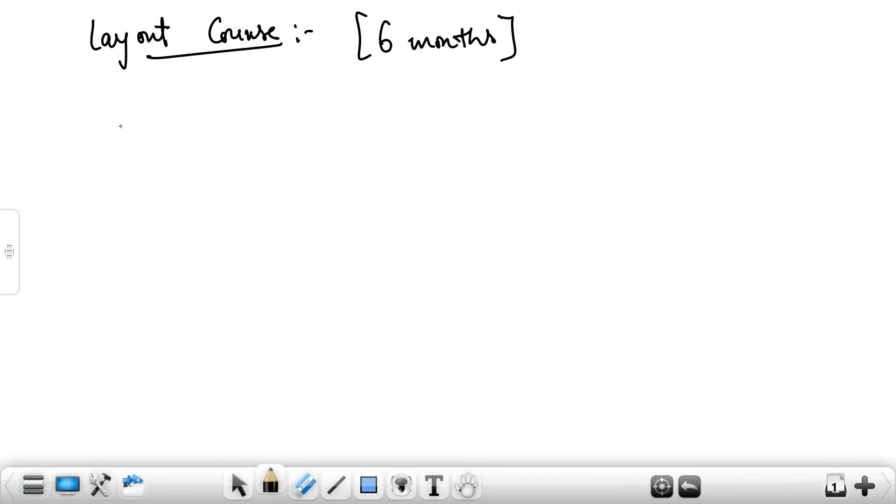So we'll be talking about these digital design circuits, and then we will be teaching you one editor, that is GVIM editor. We'll talk about this GVIM editor. After this, we'll be talking about a few scripting languages we'll be teaching you for the backend layout engineer.

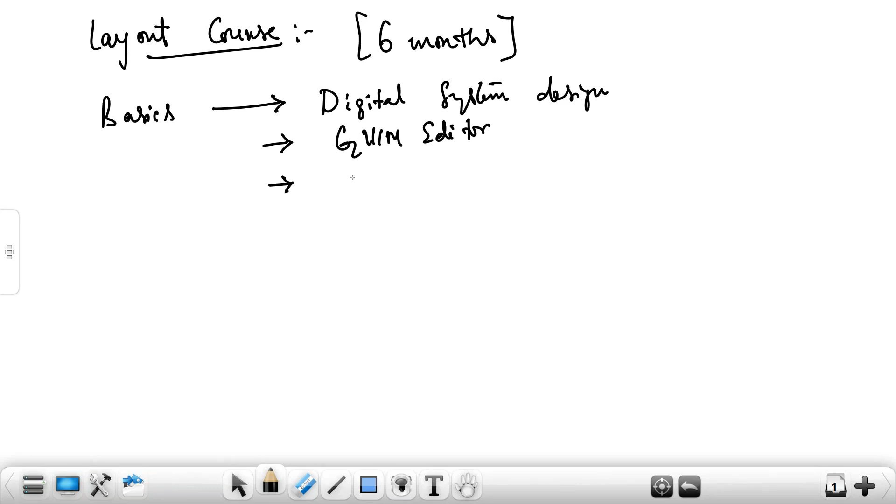So those are, we'll start with some Linux commands, basic Linux commands, and then we'll be going through tool command language, scripting language. This is about the basic course. This will go around 3 weeks or 4 weeks, probably sometimes it will go 4 weeks.

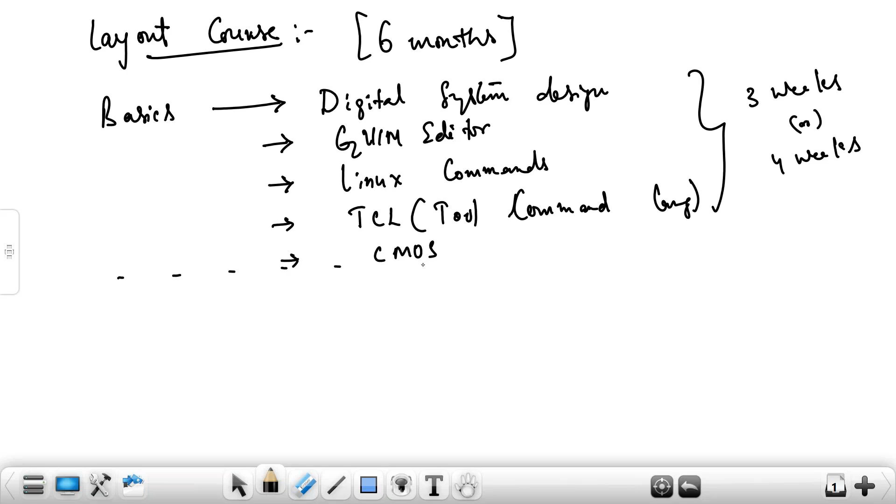So after this, in the basic course, we'll even be covering CMOS also. Once you cover this basic course, we'll be moving into the advanced layout part, where we'll be giving a brief idea about network theory, then we'll go to the layout part. Advanced layout part will go 4 months. So this is the syllabus we will be covering in the layout.

So if you look at what are the tools we are using for the layout part, the tools we are using is custom compiler from Synopsys. These tools are basically used to draw. I'm talking about the tool related to the advanced part of the layout, and probably they will be using other tools like Cygwin.

They're used for scripting languages like tool command language, and then they'll use Cygwin for Linux also. I'm not talking about that, I'm talking about what tools we are using for the advanced part of the layout. So in the advanced part of the layout, we'll be using the custom compiler.

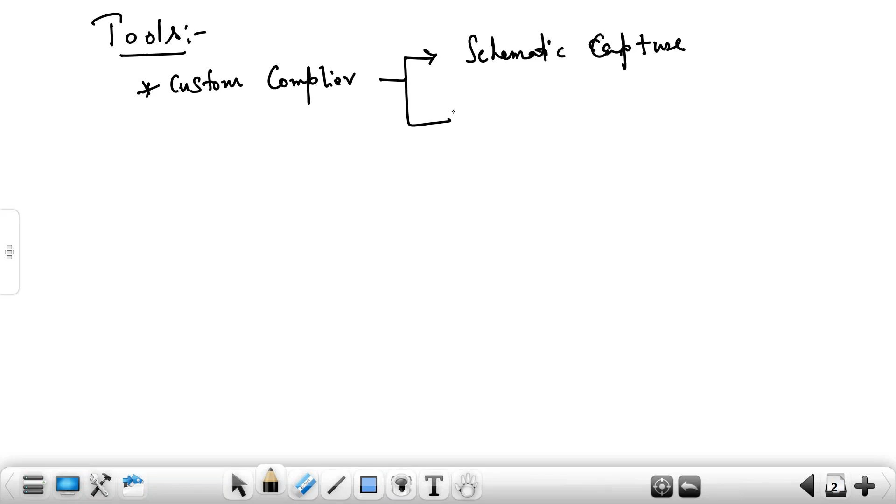Basically this is used to draw the schematic, to capture the schematic. We'll be using this for schematic capturing and pre-layout simulation, and to draw the layout we'll be using the custom compiler.

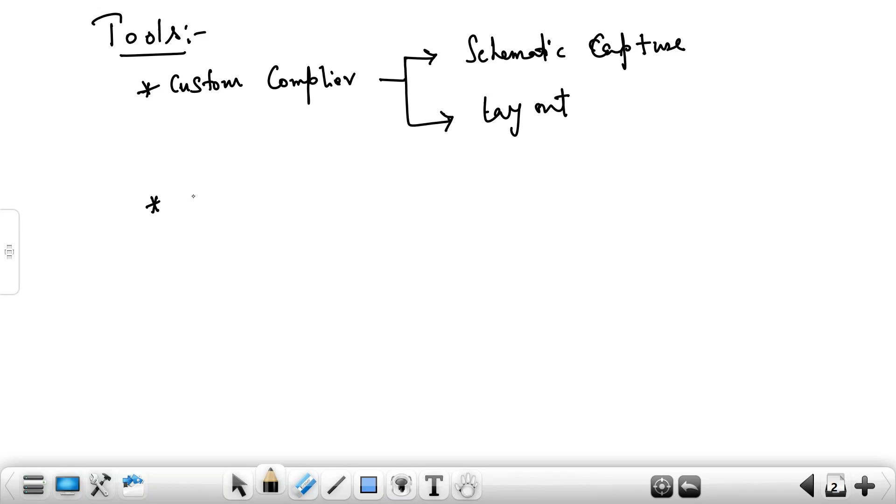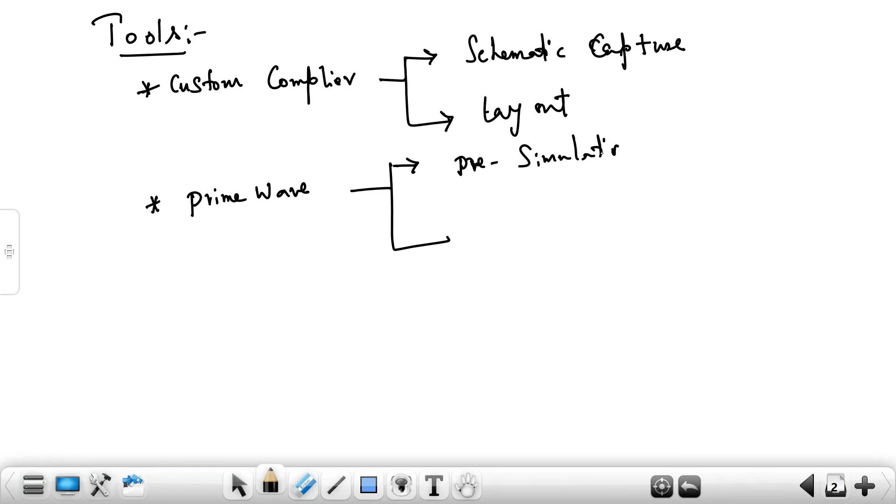And other tools which we are using for pre-simulation and post-simulation is PrimeWave. Basically these tools are used to do the pre-simulation and then post-simulation. And other tools which we are using is nothing but IC Validator, basically used to do the physical verifications.

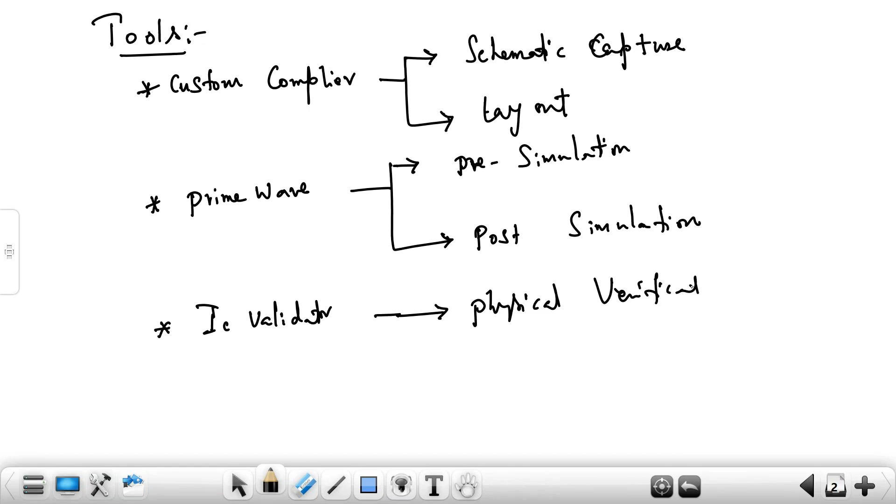Physical verification is used to check the DRC rules, the design rule checks. LVS check means layout versus schematic check. And then the tool we use to do parasitic extraction is nothing but Star RC. Star RC tool is used for parasitic extraction. So these are the tools.

So we are working in the advanced part of the layout. Now let us understand the role of the layout engineer. Why does a layout engineer come into VLSI? What is the role of the layout engineer? Basically, the layout engineer is used to design analog integrated circuits.

Layout is nothing but drawing. This is graphical. We are writing the graphical shape of the schematics. Graphical shapes of the schematics. So we need a layout engineer.

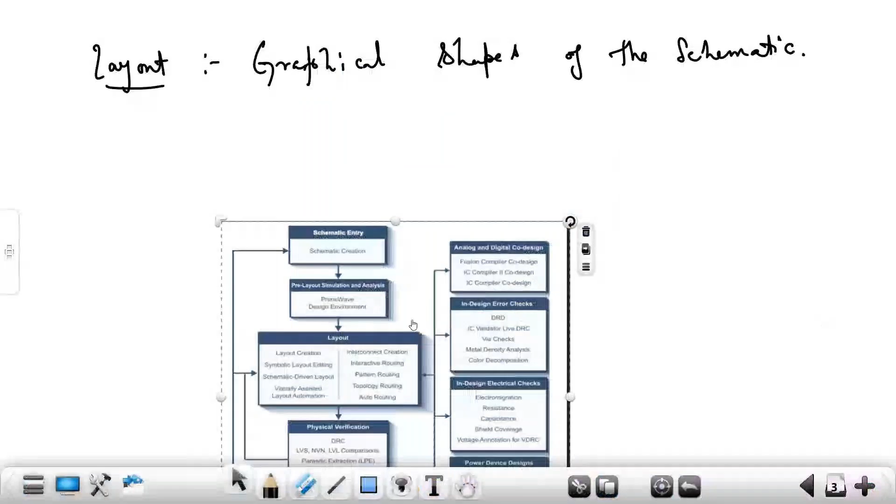Let me talk about this diagram. If you look at this diagram, this is the entire flow of layout. We'll start from capturing the schematic, up to post layout simulation. So any idea or design starts from here. We'll start from the schematic entry.

First, based upon the idea, suppose I want to design an analog circuit for amplification, an amplifier. We know that analog circuits deal with signals available in the real-time world, which are analog in nature. Nowadays, many analog domain signals are trying to push towards digital, where digital circuits are less prone to error and more efficient than analog.

Still, why do we talk about analog? Because if you take any signal before converting it, any signal available in real time is analog in nature. So without analog, it is not possible to interact with any circuits. Whatever signals you see, like voice signal, temperature variation, wind variation, all these physical quantities in real time are analog in nature.

So when you are capturing the analog signal and feeding it into the analog to digital converter, the strength of the signal is not high. So we need to amplify that. We need to improve the strength of the signals. That's where analog circuits are required.

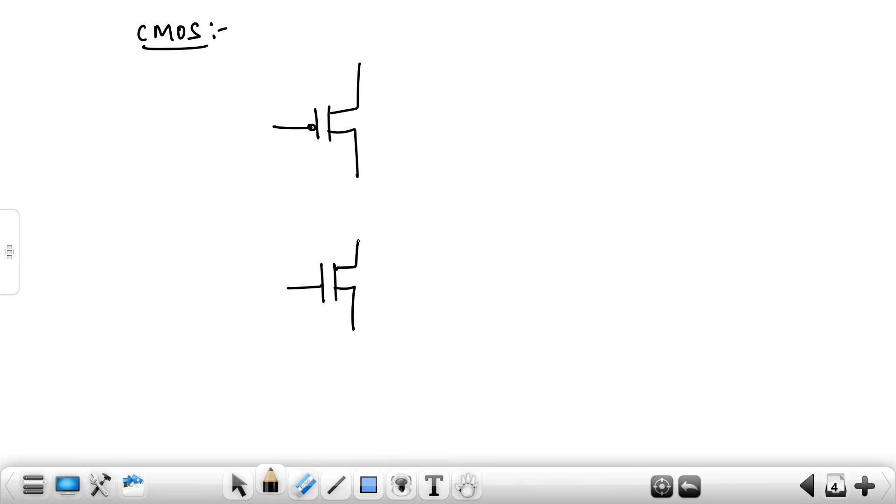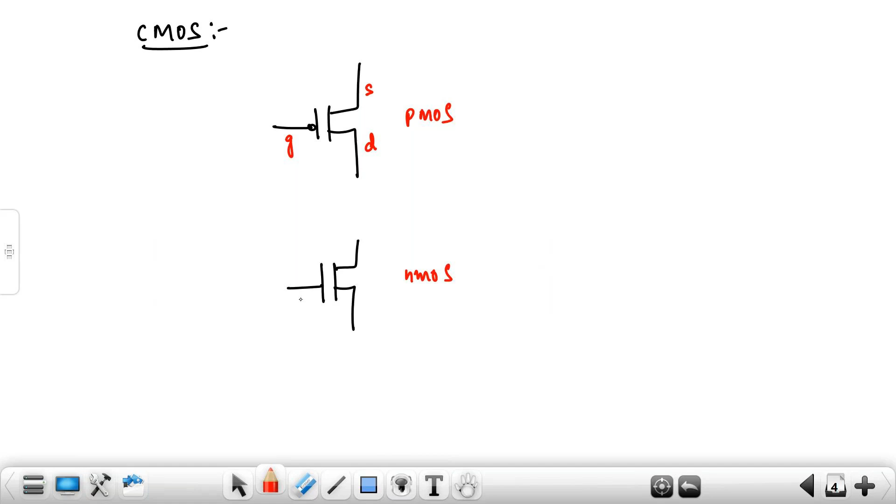Suppose you take an example of CMOS, complementary metal oxide semiconductor. It's a combination of PMOS and NMOS. If I draw the schematic of CMOS, this is my symbol of PMOS, and this is a symbol of NMOS. This is a three-terminal transistor: this is the gate, this is the source, this is the drain. Again, in the NMOS, this is the PMOS circuit and this is the NMOS circuit. This is gate, this is drain, and this is source. And if I draw the VDD and VSS rails, this is my VDD rail, and this is the VSS rail.

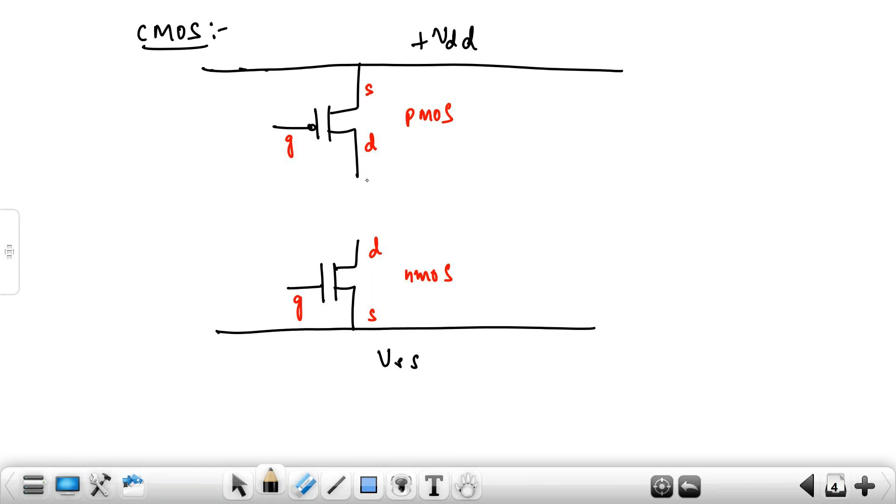Gate and gate will be shorted, and we will have a demarcation line. Above the demarcation line, we call it the pull-up network. Below the demarcation line is the pull-down network, where gate and gate are shorted, connecting to the input, and drain and drain are shorted, connecting to the output, Vout. So this is the schematic of what?

CMOS inverter - I call this complementary metal oxide semiconductor, a combination of PMOS and NMOS. To design any analog related ICs, first we start with an idea, and based upon that idea, we draw the schematic. Once you draw this schematic, we should understand how this schematic is working.

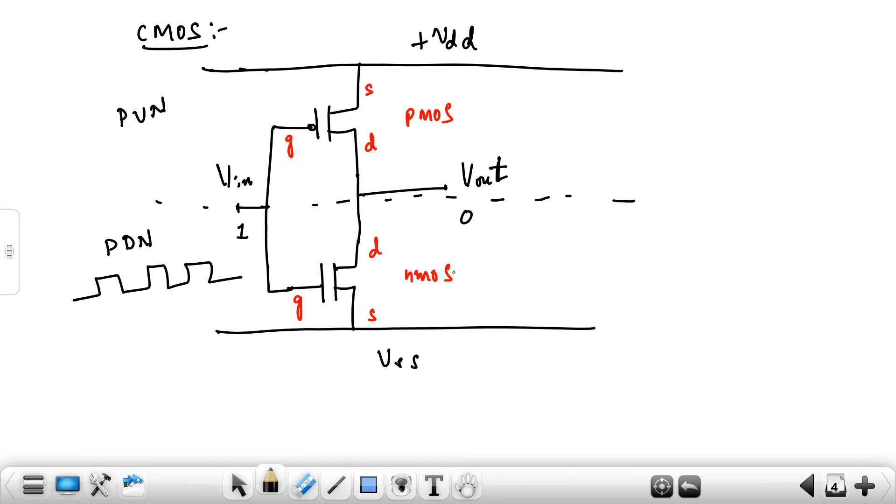So this is the CMOS inverter. The inverter operation is nothing but if I give the input as logic 1, it gives me the output as logic 0. So if I'm giving any pulse like this, the output should be the complement of this, complement of this. So this is a step we call as pre-simulation.

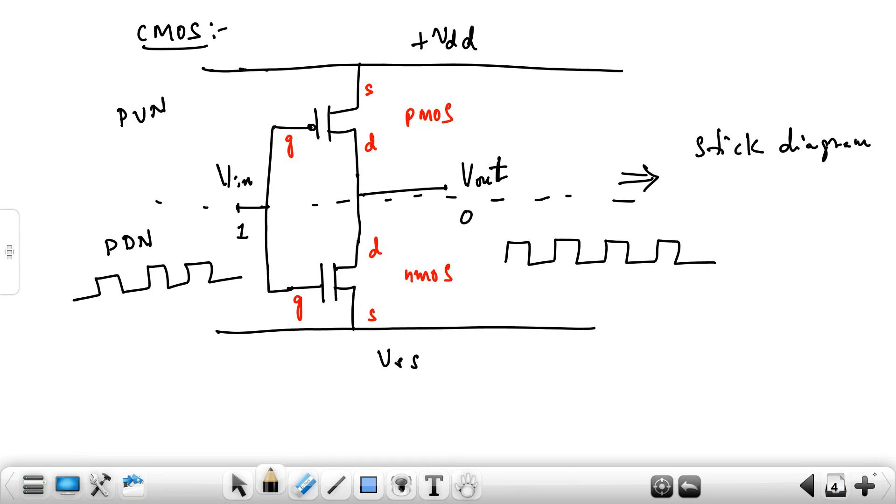First you capture the schematic. Once you capture the schematic, do the pre-simulation. Once you do this pre-simulation, then we'll be drawing the stick diagram. Stick diagram - if I draw the stick diagram for the CMOS inverter, how you can draw?

This is my VDD, this is my VSS, this is my VSS, and this is my demarcation line. So the transistors are represented like a symbol plus symbol. This is a PMOS above the demarcation line. Below the demarcation line, this is nothing but an NMOS. Above is PMOS, below is NMOS.

Now I can label the transistor terminals. Like this, I'm going to label as gate. This I'm going to label as drain, source, and this is nothing but drain. Similarly for this NMOS, I'm going to label this as gate, source, and drain. This plus symbol indicates the PMOS and NMOS. So how can you connect this in the stick diagram?

How to draw the stick diagram? This is nothing but - you can see the source of my PMOS is connecting to the VDD line. So this is connecting to the metal. This source is connecting to VDD, and this gate and gate is connected. The gate is made up of polysilicon. This is connected - gate and gate of both PMOS and NMOS, and then this gate is connecting to the input, to the metal.

This is V-in, and then drain and drain are connected. This is connecting to V-out. So this is the stick diagram of the inverter. So we need one PMOS and one NMOS. Source is connecting to VDD, and this source is connecting to VSS, this source is connecting to VSS.

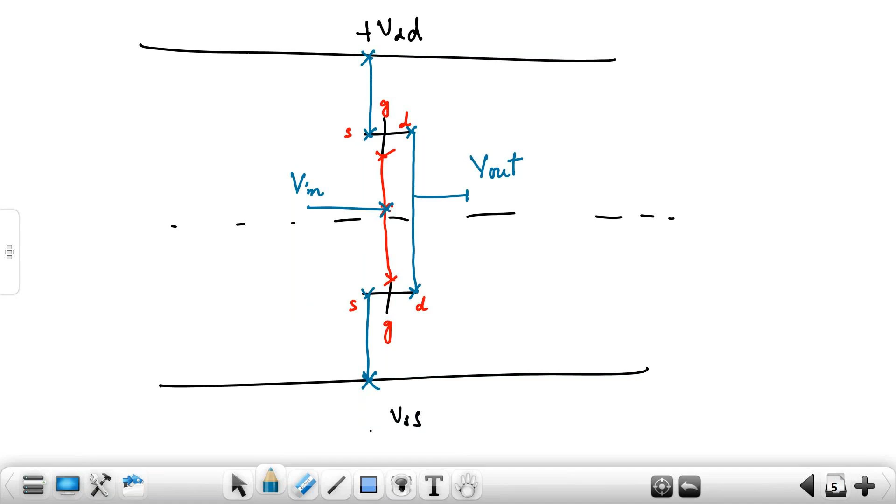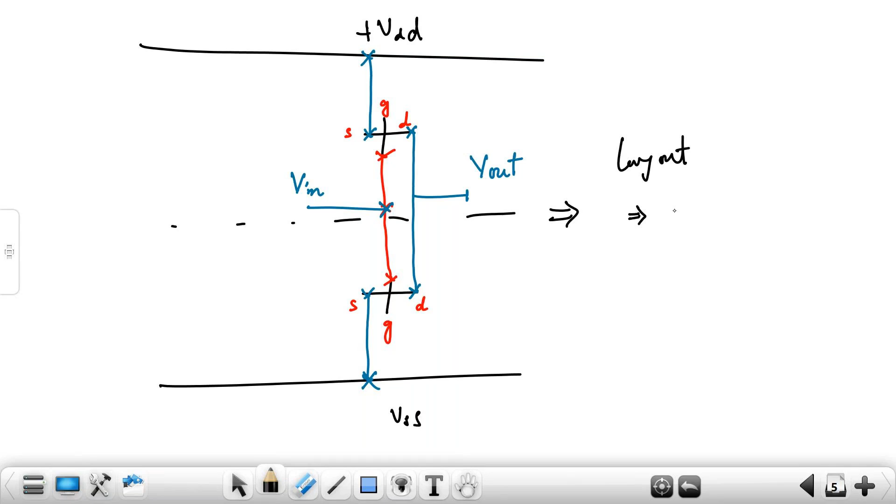This is what I'm transforming - my stick diagram into the what? Schematic to the stick diagram. Transforming the schematic diagram to the stick diagram. Now, what is a layout? It's nothing but when you know how to draw the stick diagram for any schematic - layout is nothing but the standard dimension. This is nothing but a stick diagram with standard dimension, meaning dimension. This is nothing but a layout.

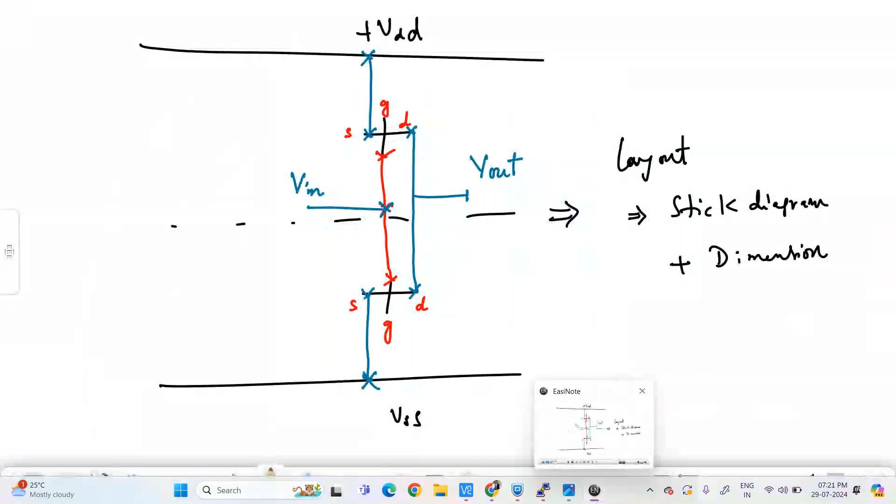So in this course, we will be talking about how to capture the schematic. Once you capture the schematic, how you can do the pre-simulation. The steps are like the flow of this layout, designing any analog based integrated circuit. The flow goes like this: start with the schematic, do the schematic creation. Once you create the schematic, do the pre-simulation. The pre-simulation is basically done with the PrimeWave - the tool which we use for this is PrimeWave.

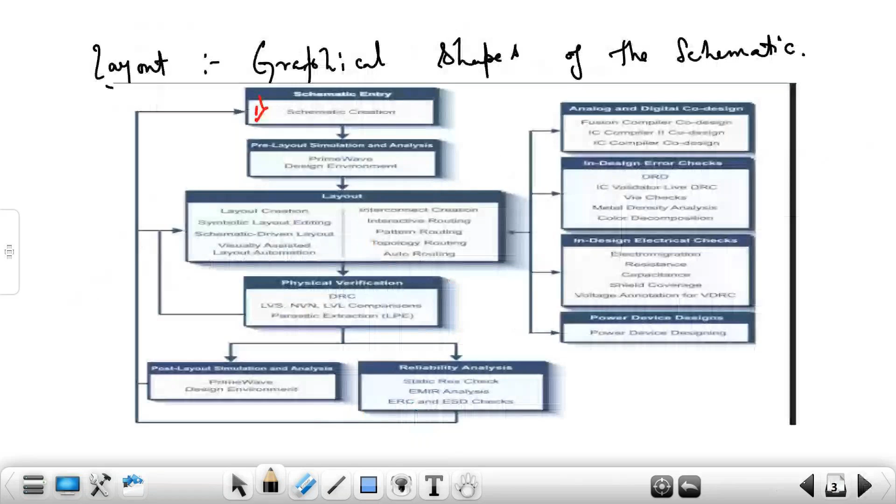This is what, let me show you. So start with the schematic creation. Once you create the schematic, do the pre-layout simulation using PrimeWave design environment. Once you do this pre-layout simulation, again we'll go for the layout. In the layout, we'll do how to do the routing, how to do schematic layout editing, how to do auto routing, topology routing, pattern routing, interactive routing, how to do interconnection of the layers. This is done at the layout section.

So once you draw the layout, we will be working with DRC rules. DRC means it is a design rule check. This design rule check will be depending upon the foundry. So different nanometer technology works with different DRC rules, provided by the foundry. So based upon that, different node which you are working on, different channel length which you are working on, you have to verify your layout with DRC checks.

DRC checks, and you will do LVS checks - design rule check, LVS check, and other checks we will do. Then after doing the checks, we'll do the parasitic extraction checks, LPE checks. So at the time of layout, the other checks we are doing are design error checks like DRC error, via checks, metal density analysis, color decomposition, and then some electrical checks like electromigration, resistance check, capacitance check, shielding coverage checks, and then some power device design checks we'll do after drawing the layout.

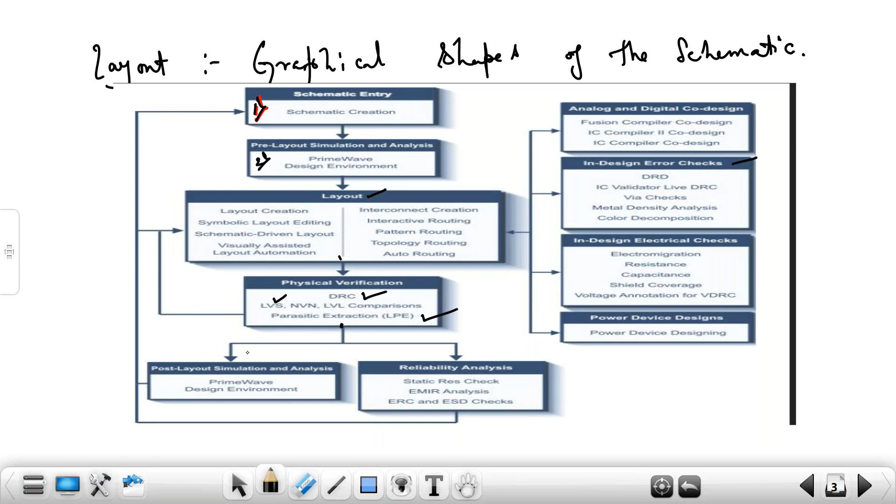So once you draw the layout, we will be doing the DRC and LVS checks. Then after that, we'll do the parasitic extraction, and again we'll do the post-layout simulation, comparing the operation after drawing the layout with the pre-layout simulation. We'll also do checks like reliability checks, static resistance check, EMIR analysis check, and electrical rule checks after drawing the layout.

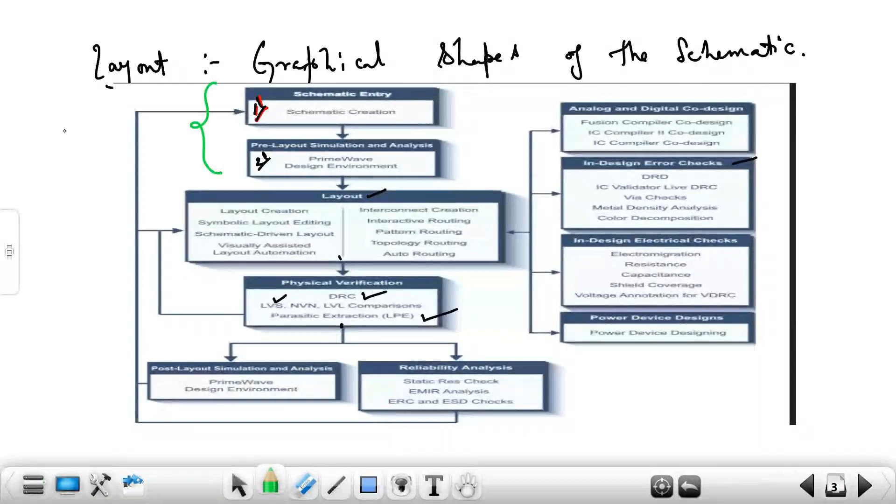So if you see this entire flow of layout, this part is handled by the design engineer, and this part is done by the layout engineer. Basically this section can also be called post-layout engineer, and sometimes this is also done by design engineers. So in our course, mainly we'll focus on this: the custom layout design.

So we'll focus on this. Given a schematic, after doing the pre-simulation, we'll understand how to draw the layout for the schematics, and mainly focus on how to do DRC checks and LVS checks. Then we'll see how we can extract the parasitic extraction, like resistance and capacitance checks.

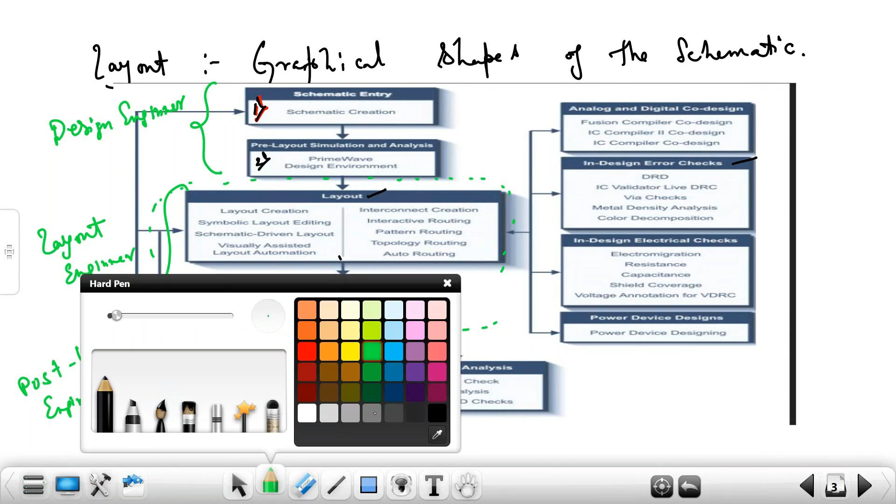So for this flow, I've already mentioned what tools we are using. For capturing the schematic, we'll be using Custom Compiler, and for the pre-layout simulation, we'll be using PrimeWave. To draw the layout, again we'll use Custom Compiler, and to check LVS and DRC we'll use the tool called IC Validator. To do parasitic extraction, we'll be using StarRC, and again for post-layout simulation, we'll be using the PrimeWave environment.

Many other SPICE tools are available, but we are using PrimeWave from Synopsys. For the other checks, we need other tools which we are not discussing, since those tools cost more. So we will not be doing all those checks; mainly we'll focus on how to draw the layout and how to check DRC and LVS.

So this is the entire flow to design any analog integrated circuit. The flow starts like this: start with schematic creation, do the pre-layout simulation, then draw the layout, then do verification like DRC and LVS and other checks, then do the post-layout simulation.

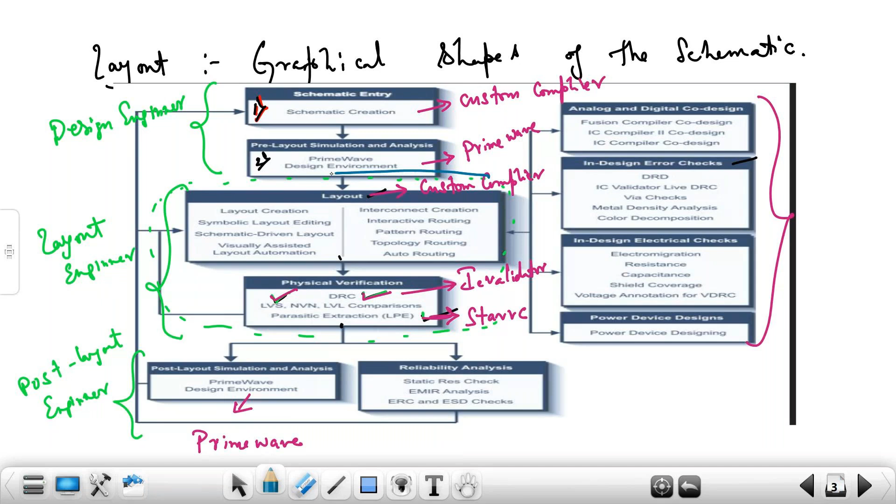In this course, especially, we'll be more focused on this part. We will teach you some analog circuits like level shifters, Schmitt trigger, single-stage op-amps, two-stage op-amps, and some PLL circuits, PLL blocks, and voltage controlled oscillators. We'll show you how to capture the schematic and do the pre-simulation, and once done, we are going to draw the layout for the given analog schematic.

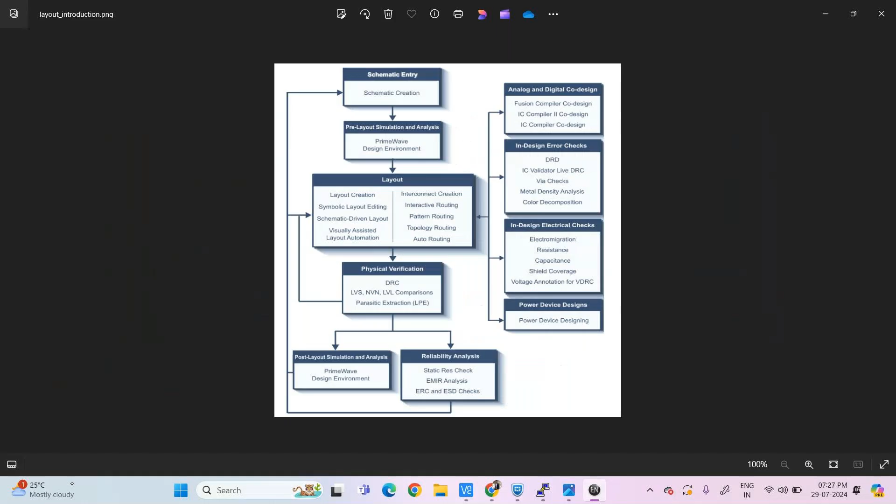So with this brief introduction, as I mentioned, this is a 6-month training course. The first 2 months basically cover the basics like digital system design, CMOS, and semiconductor metal oxide fundamentals. Then we'll talk about TCL programming, then the Linux part.

In the advanced part, we'll go through network theory, and then we'll start with what are the different layout issues, and then talk about how to do prevention of layout issues. So in this course, let's go through the syllabus and what circuits we'll be covering.

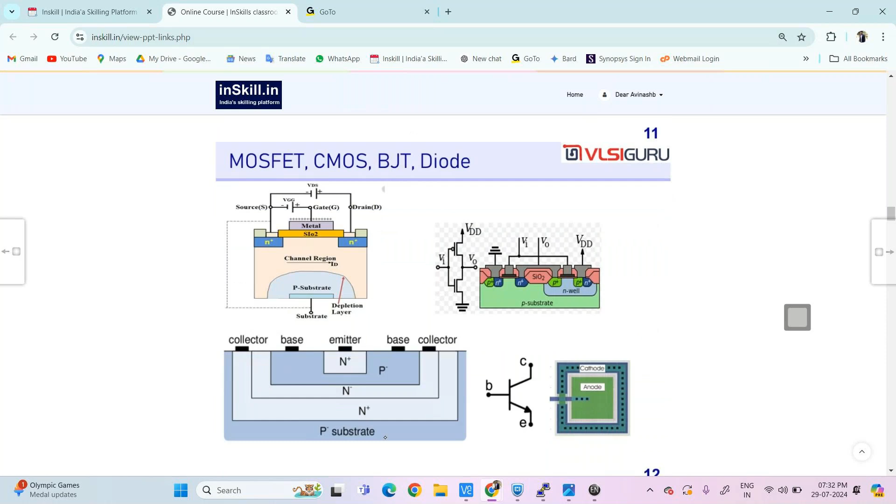In CMOS, we'll be talking about complementary CMOS, semiconductor properties, and MOSFET, different types of MOSFET and its operation. In device physics, we'll talk about basic semiconductor devices like diodes, PN junction diodes, bipolar transistors, and MOSFET. Then we'll talk about the fabrication process, and we'll understand how to draw the stick diagram for a given schematic.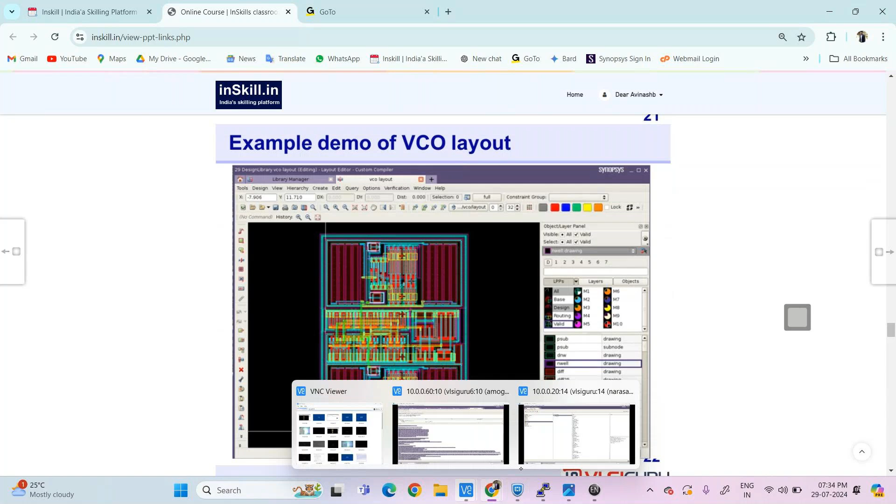Let me show you a few layouts which we developed. The tool we are using for this is nothing but Custom Compiler to draw the layout.

So you can see, let me go with the circuits. Let us go with the inverter. Okay, let me go with some analog circuits. An analog circuit, I'm taking as a level shifter. This was the schematic of the level shifter.

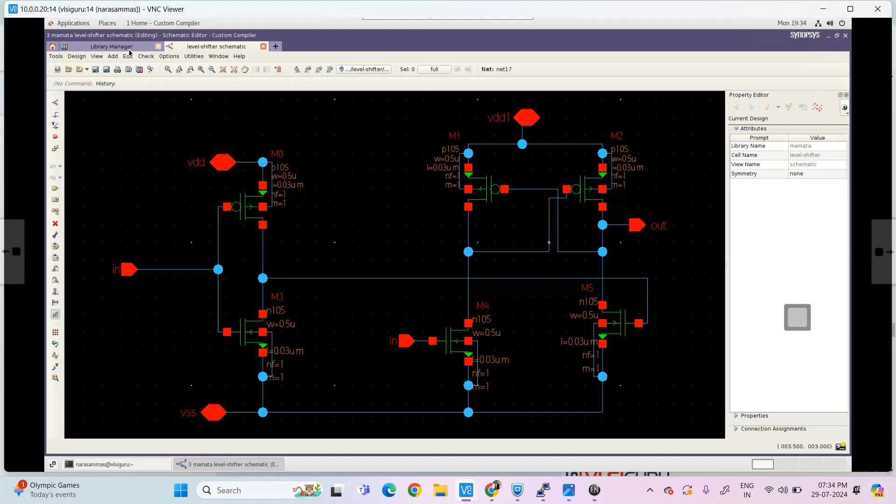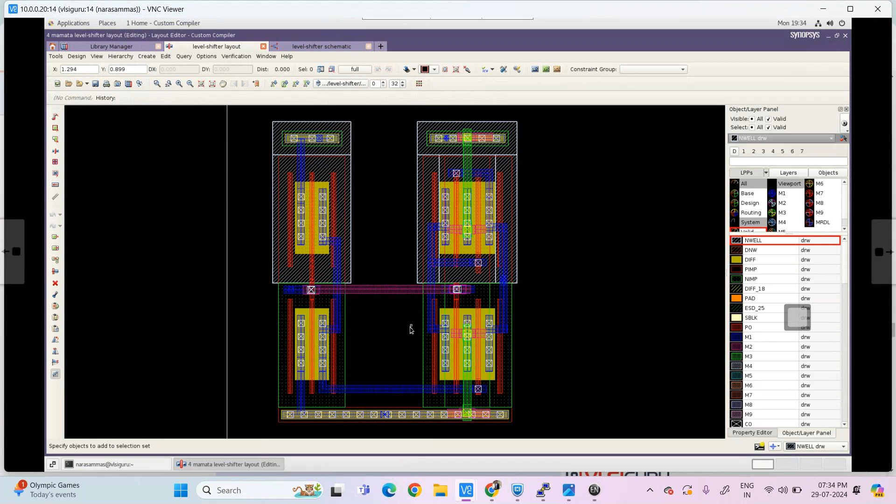We'll be teaching you how you can draw the layout for this. You see, this is a layout, this is a layout of the level shifter, made up of three CMOS - this is one CMOS, and this is two PMOS and two NMOS. We will make you understand how to do routing, how to do placements, how to draw the different metals, and what are the properties of the different metals. We will be teaching you this, and even the pre-simulation. So let me go through this.

For pre-simulation, we'll also teach circuits like PLL, converters, single stage op amps, dual stage op amps, some circuits like source followers, and current mirror circuits.

I think this is not working. Maybe the server is busy.

Some of the circuits will teach you how to do the pre-simulation. For example, you can see this is one of the circuits for the phase frequency detector.

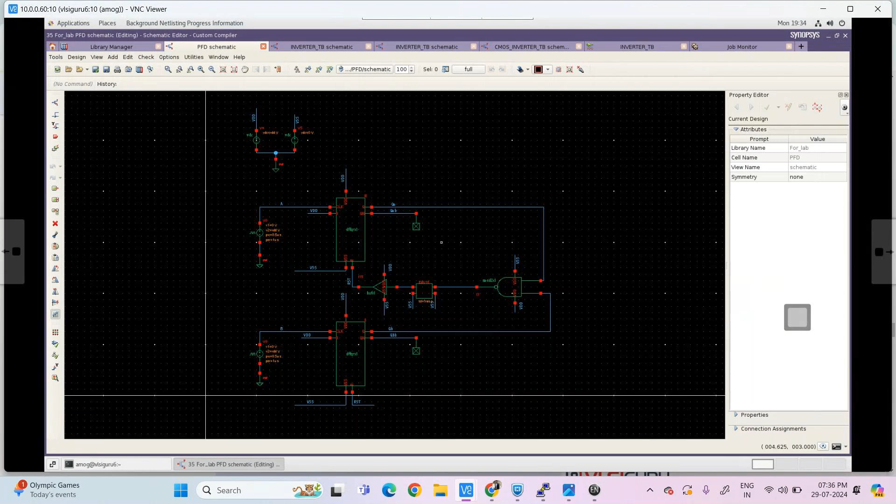So this is one block of your PLL. We will be teaching you all the schematics used for bigger blocks like PLL and analog to digital converters, including how to draw the schematic and do pre-layout simulation and then the layouts.

So this is the complete overview of what circuits we'll be talking about in the analog layout part.

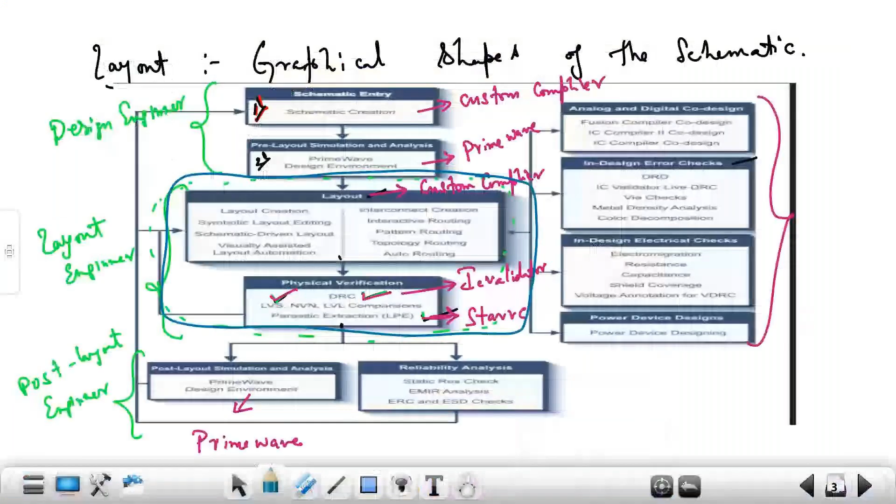Is this installable or will you give remote access? Let me talk about tool access. We will be providing you remote access. How tools are given to you is we'll be providing the tool credentials, working on a FortiClient VPN. We'll generate and give you the credentials - username and password - so you can work remotely.

Tool access will be provided for 24/7.

Once you enroll, they'll create the FortiClient VPN and provide the username and password, and even share what IP address you're working on, then using Putty with username and password they will share. All tool related things will be provided after enrolling, and they will also teach you how to configure the Putty client, VPN configuration, Putty configuration, and VNC configuration. They will also teach you how to invoke the tool in the Linux operating system, so you can do remote access. The tools can be given for remote access.

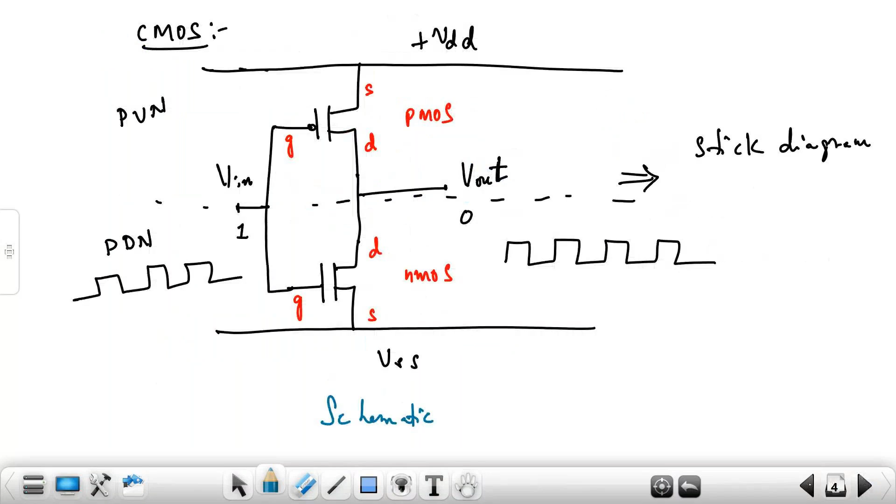Basically, for this course, after each course completion, we will be doing a test. So once you're done with the basics, like digital system design, here's how the evaluation process is done to select your resume and give it to the client. We'll conduct the test, evaluate your presentation, and ask you to prepare 10 to 15 slides on a topic of your choice related to digital system design, to check your presentation skills.

Then we'll be conducting mock interviews for each course. For each course, the student has to secure at least 80% marks. This marks will be evaluated at the time of job support. They will check the performance across all the tests, and you should meet at least 80%. Then they will select your resume and share it with recruiters after completion of the course.

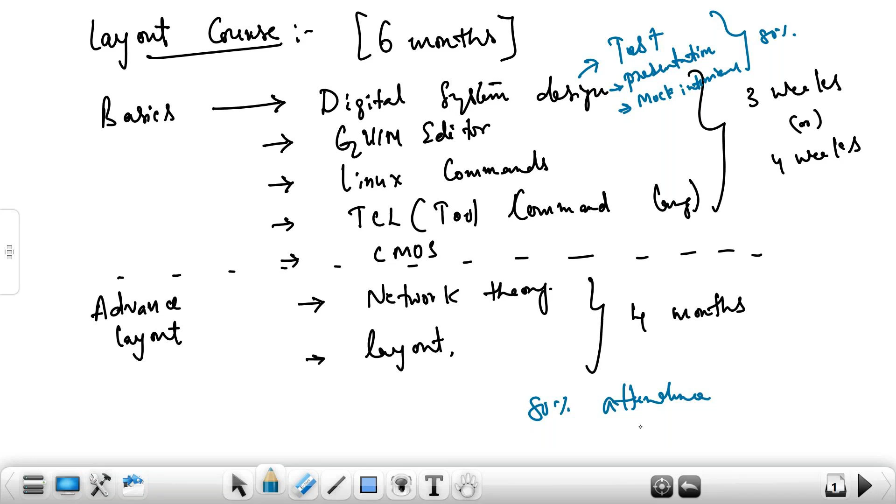And then coming to attendance, 80% attendance is mandatory, whether you are attending offline or online sessions. All this will be checked at the end of the course when they start the job support.

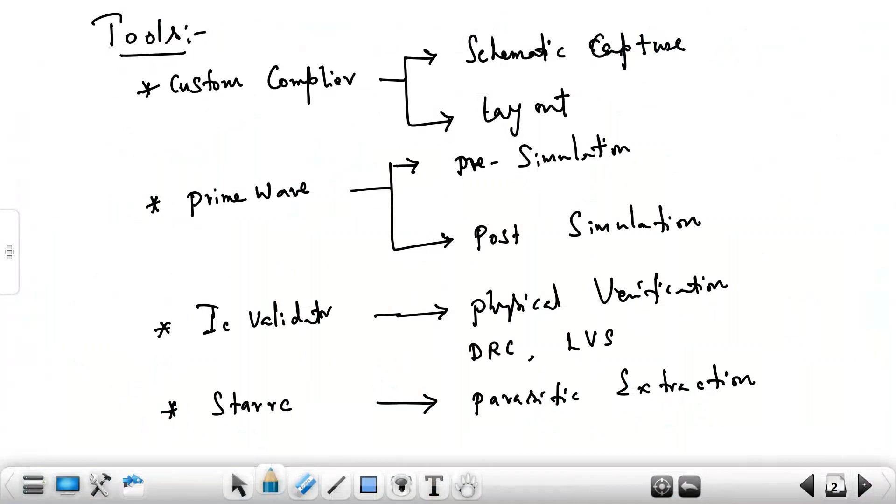Sorry, I hadn't mentioned that. Basically we have a run set file for 40 nanometer. We'll be teaching you how to do pre-simulation using 40 nanometer, though it's irrespective of the nanometer node, no problem there. So we'll use 40 nanometer for schematic capturing and pre-simulation.

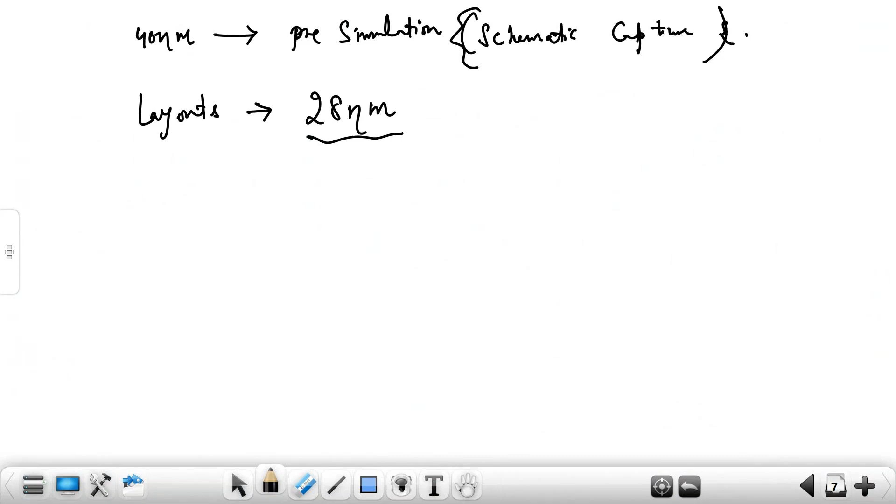For drawing the layouts, we'll use 28 nanometer. We use the 28 nanometer PDK, the process design kit, for all the layouts, while the pre-simulation will be done with the 40 nanometer. So, 40 nanometer PDK is used for pre-simulation, and 28 nanometer for drawing the layouts. Did you understand?

So any other questions? Go ahead. Hello, yeah Abhishek. If someone misses any classes, because I am a working professional, will recordings be provided for the missed classes or anything like that?

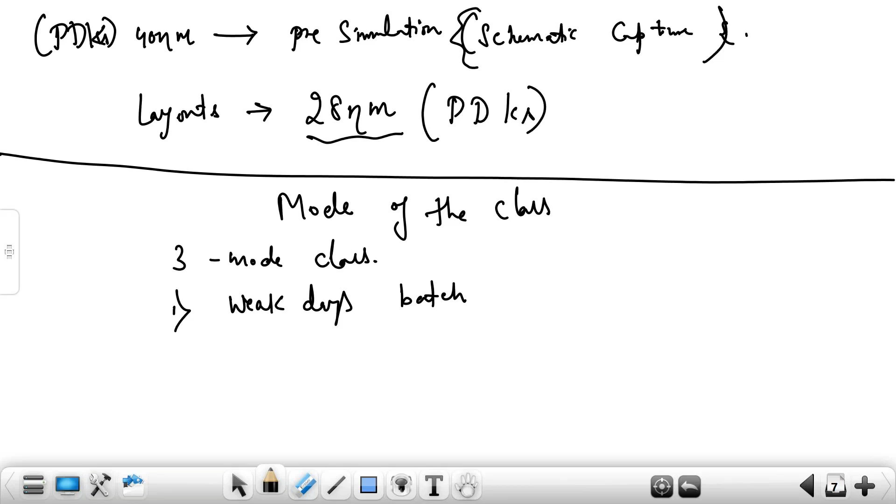Let's talk about the mode of classes. Basically we have three modes of classes. The first mode is weekdays batch, from Monday to Saturday. First we teach the theoretical aspects followed by a lab session — morning theory sessions, afternoon lab sessions on weekdays. The second mode is weekends, which we conduct on Saturdays and Sundays.

Saturday and Sunday we'll be covering the theory as well as the lab. But comparatively, the weekend batch size will be greater than your weekdays batch. Okay, this is the second mode.

And then the third mode is e-learning, where we are providing recorded sessions for all the schematics and layouts. From your end, you should practice by going through these recorded sessions. Any questions or doubts, we'll be creating a WhatsApp group where you can post your query. For any support sessions required for the e-learning, we'll be arranging them on Saturdays and Sundays.

Sir, will the content of the e-learning mode and the other two modes be the same, or will there be variation in the content of e-learning? Same content. What are the contents for weekdays and weekends? We'll be providing the same content.

Each day when the session happens, we'll be doing the recording of that, and that recorded session will be available each day after 7:30 p.m. We have a platform called InSkill. We'll be providing you the username and password on the InSkill platform where you can see that today's session recording is available after 7:30 p.m.

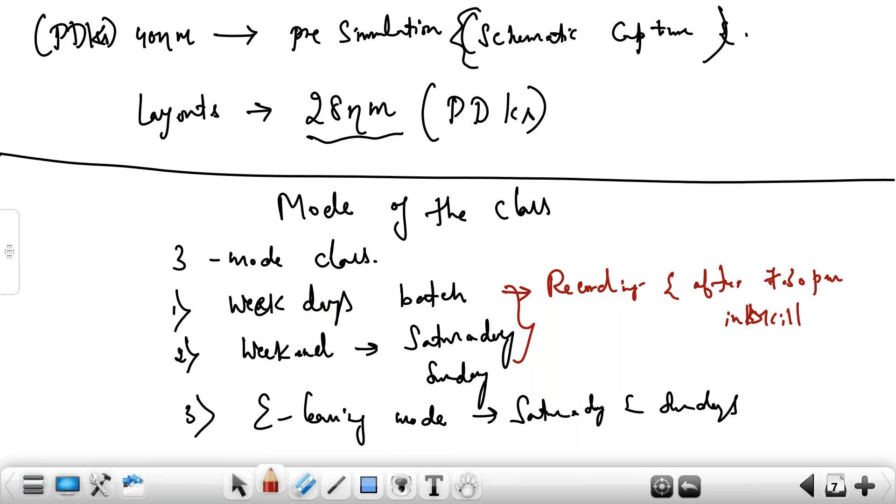Right now I am working in the power management domain, that is in analog circuits only, so the domain is something similar. I have worked on a lot of things in analog circuits, I have also done a lot of projects, but I did not get any opportunity. That's why I am looking for this course. So my domain is also related to analog electronics.

Yeah, in such a case you can add whatever work you have done to your resume. I think regarding the experience, for the career gap you may need some added experience certification - you should talk to the admin, I have less idea about that. Suppose you are seeking any experience certificate from the institute side, you should talk to the admin regarding that. But coming to placement, until you get placed, support is available from the institute - for placement support and for sessions, until you get placed, support is provided from the institute.